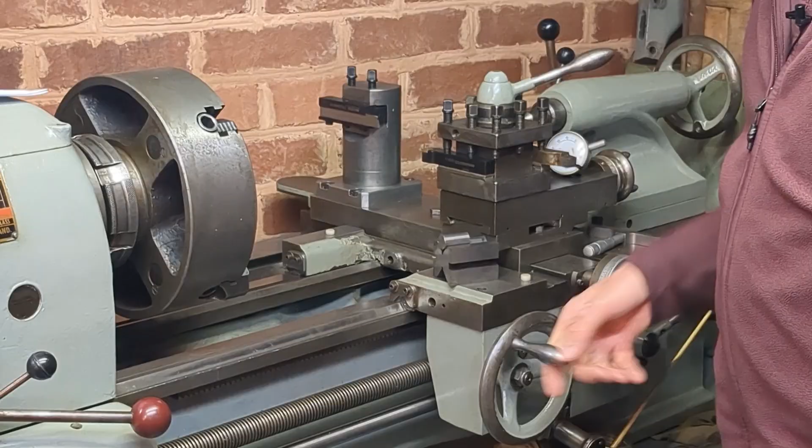Having just completed a few projects on my milling machine, I thought it was about time I returned to one of the lathes, and today I'm going to be working on the Colchester student lathe. This is a job I've been meaning to do for some time. I've never had a saddle or carriage stop for this lathe, and I've wanted one for some time. Up till now I've managed by clamping a piece of stock to the bed, but it's really not very convenient. There are second-hand carriage stops available online for this lathe, but they're ridiculously expensive, so I thought it would make an interesting project to make one anyway.

I'm going to use a piece of 2-inch mild steel round stock, which seems to be about the right size, and it will clamp in this position here. I'm going to make it so I can use it on both sides. On this side it would be used as a stop, and on the other side I might use it with a DTI.

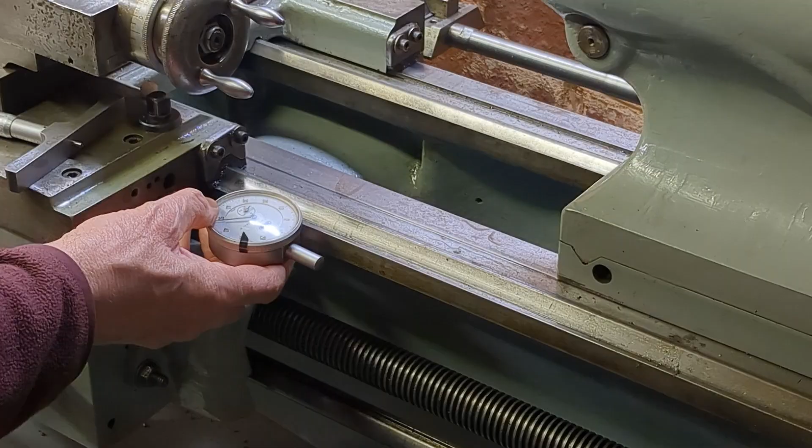I do from time to time use a DTI to index the saddle. Until now I've just done that by holding it off a magnetic base, but it's really not very convenient with this style of bed. So I'd like to have a feature on the carriage stop which will hold a DTI.

I was thinking about having a thimble style adjuster on the carriage stop, but I don't really think that's necessary. I think a feature to hold a DTI, combined with the top slide, will really make that feature redundant.

I didn't want it just to rest on the two flanks of the V with a locking feature underneath, because there is a tendency for the whole thing to want to rotate. To resist that rotation, what I'm going to aim for is location on two flanks of the V and the front face, with the locking feature underneath.

That will give a more positive location, and also if I make it long enough it will make a more stable carriage stop which I can index along if I ever want to use gauge blocks.

Now, to ensure location on these two flanks and the front, I need some good measurements. The way I went about that was to use my smallest V block with this bit of stock in here.

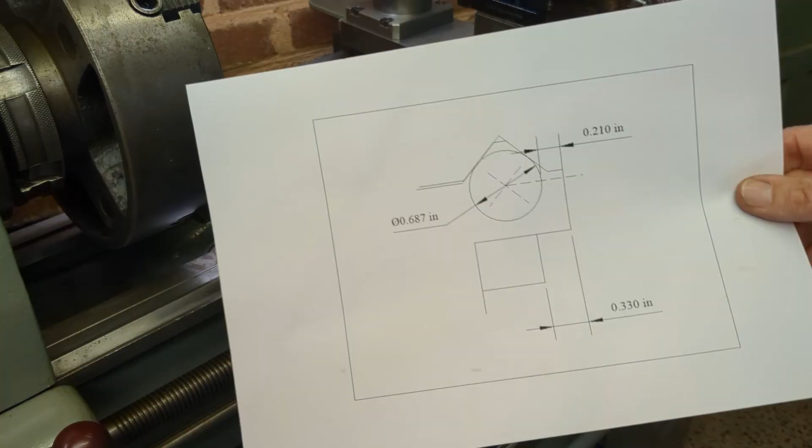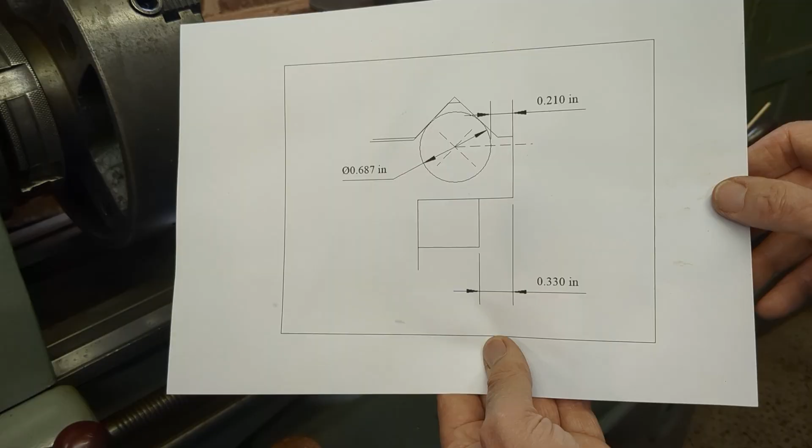Those two measurements I transferred to my CAD drawing, which gave me fairly precise dimensions of the two flanks of the V in relation to the front face of the bed. That was the first part of my layout, and hopefully that will enable me to achieve a carriage stop that won't rotate. Also, having good dimensions will hopefully minimize the amount of trial and error in getting this to fit on the bed.

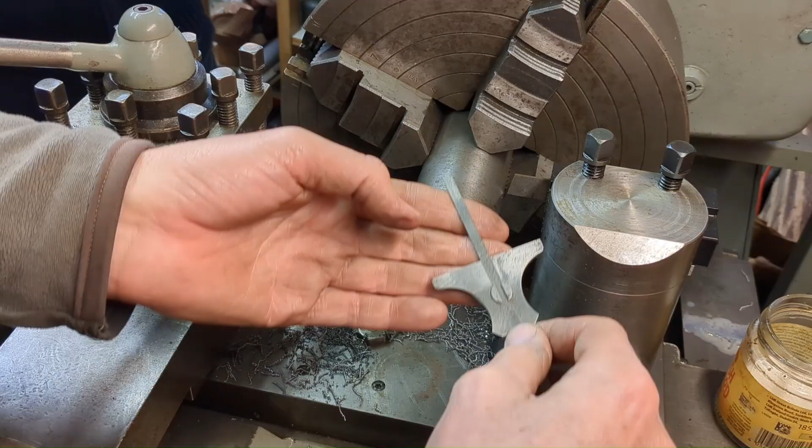So I'm carefully setting the parting tool and locking the carriage to part off 2 inches of stock.

I put some considerable time and effort into making this rear-mounted tool post, which I'm now using for parting off, and I thought I had solved the problem of parting off, but as you're about to see, I had another foul up—though I think I know what the reason was.

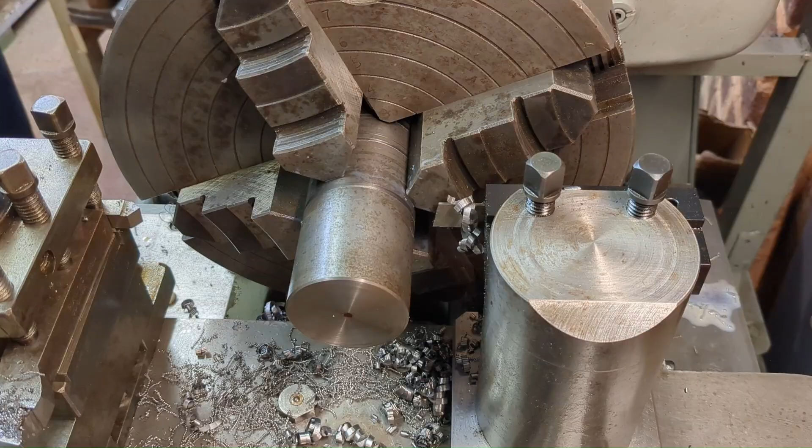Okay, after that nasty foul up, I've reground the parting tool and brought it out just over an inch, so hopefully we can get right the way through. I'm just taking it very carefully.

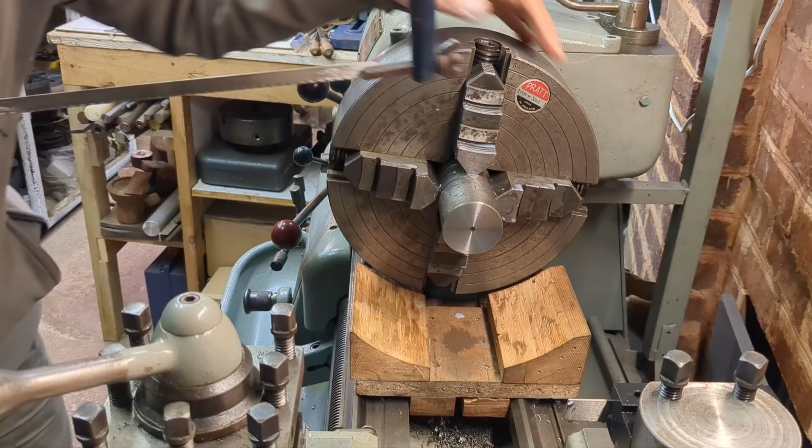I could hear a change in the sound of the cutting towards the end there, so I thought that last little bit I'm not going to risk it. I'm just going to cut that off with a hacksaw.

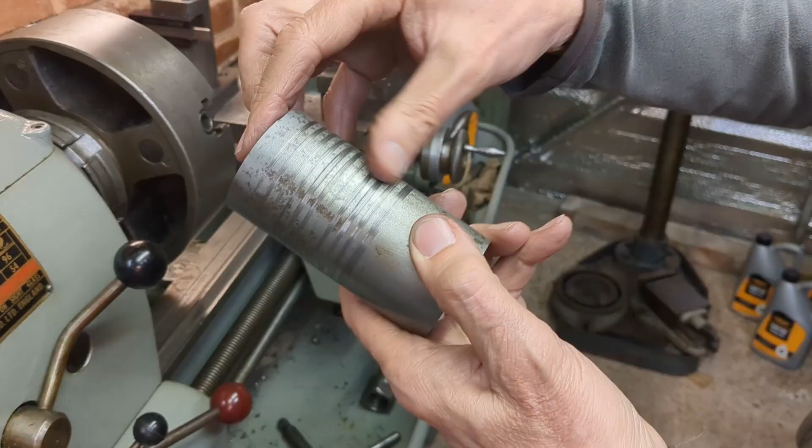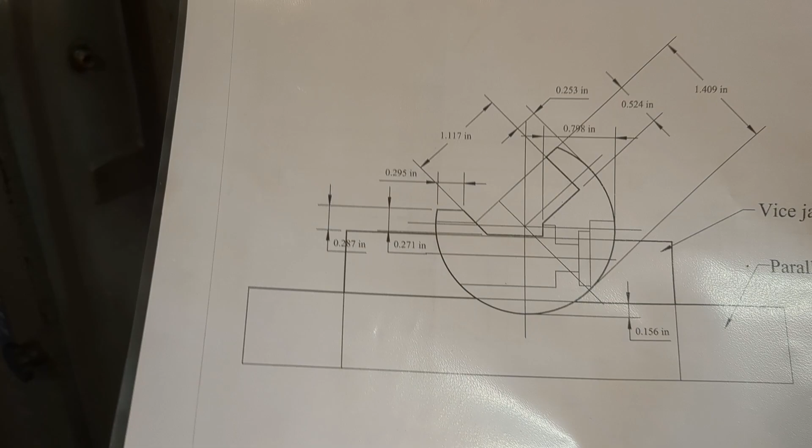Just in case you think the chuck wasn't fully tightened, you can see how the jaws have really dug into the material there. Now I've thought a little bit more about the setup I'm going to use, and for machining this slot, I'm going to use the vertical head. So I'll come in, machine these surfaces, then rotate the head 45 degrees and come in this way. I figured the best way of doing that is in my smaller vise, sitting the work on a parallel or a couple of parallels.

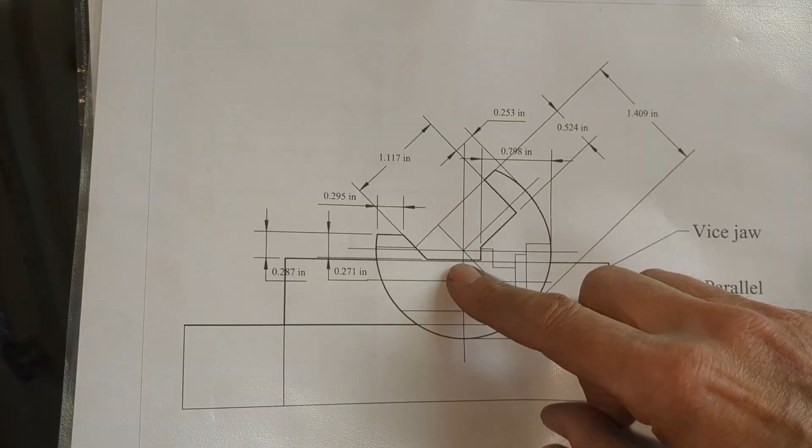So I'm going to put a couple of slots in the rear, and that will just ensure that the work sits lower in the vise. I just have enough clearance there to machine this out without touching the top of the vice jaw, so they give the maximum possible seating area.

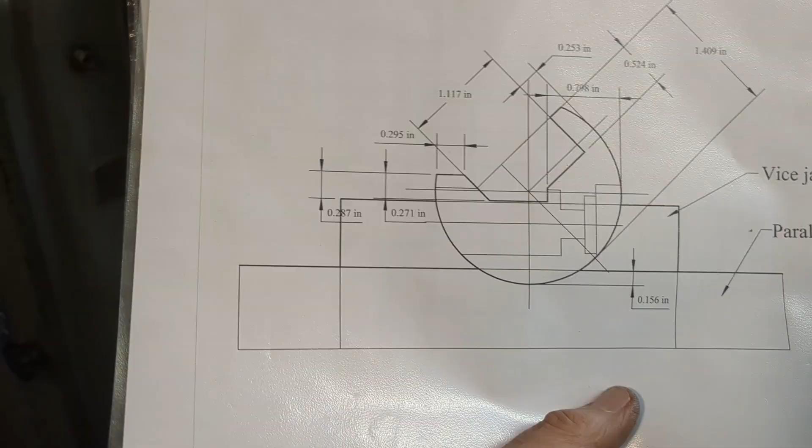The other feature of this is it will enable me to index it around to get this vertical for boring. So I'll use this slot as a measuring device for when I need to rotate it 90 degrees. So I'm going to go ahead now and machine these two slots. Just touching off the top there, that's a 2/1000 gauge, and then we can work out how far to bring the table up.

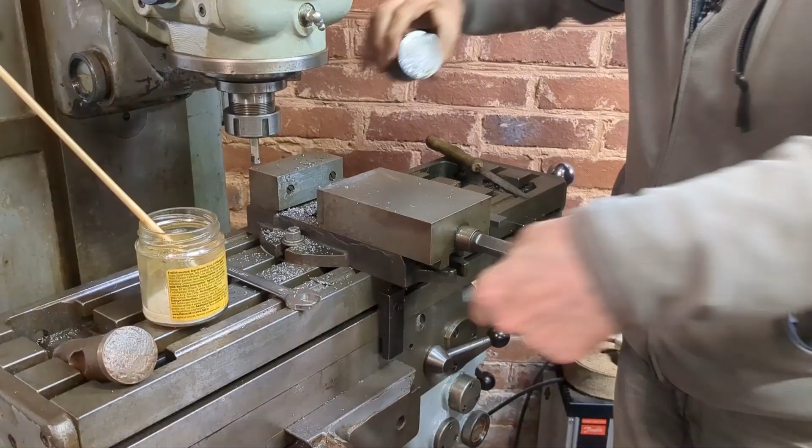So the square is clamped to the work in the slot, and I'm using the DTI to tram the square.

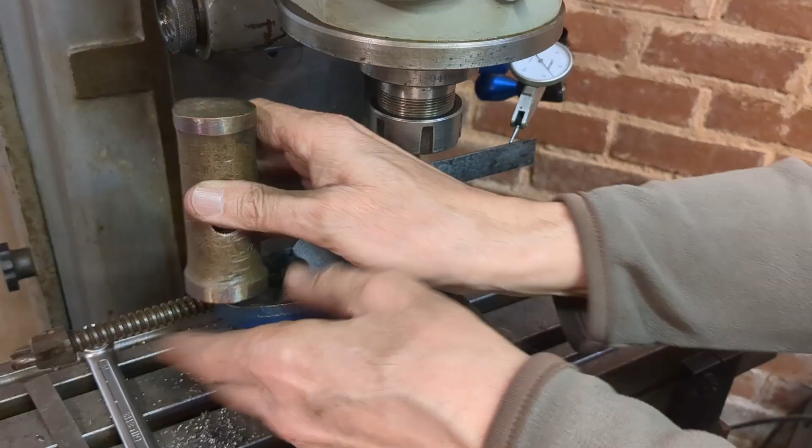The position of the cross hole relative to the slot, which will be machined later, is actually quite critical. So I'm carefully measuring from the diameter, again using a feeler gauge, and also from the end of the work to get the true center line. And even though I took some care over this, you'll see in the next video that I didn't get it quite right and had to make a slight adjustment.

I'm counterboring the seat for the bolt head, and there's a bit of chatter here, because this tool is actually flat bottomed. I couldn't be bothered to regrind it. And now, at last, center drilling for the bolt hole.

Now, because my mill is actually a horizontal mill with a vertical milling head, I don't have a lot of height. So for these kinds of operations, I transfer the work in the vise to my pillar drill.

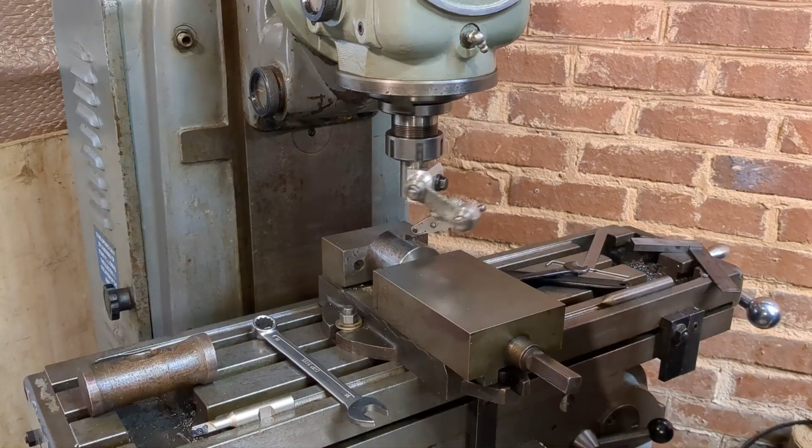Good, that's centered over the hole now, so we can remove that and put the boring head back in place. Without disturbing the work in the vise, we're back on the milling machine, and I'm now counterboring for the head of the bolt.

Okay, I've reversed the component, put it upside down, so we're going to bore from this top surface, or the bottom I guess it is. I put the square again on the slot there, and I'm just tramming it up. Actually, it's not as difficult as it looks.

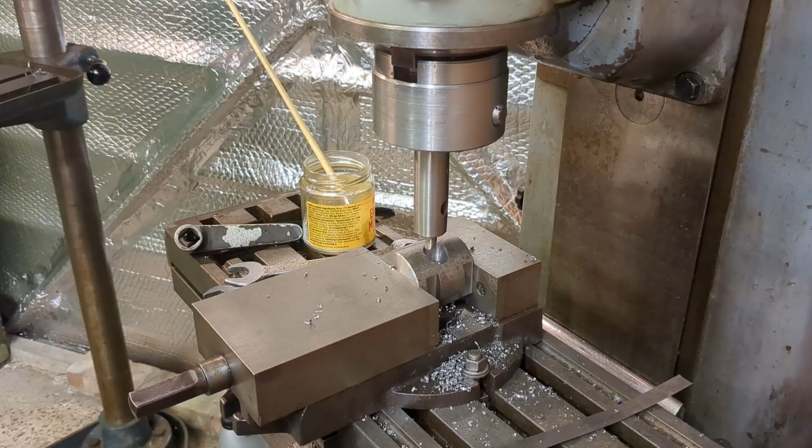Okay, the problem we've got is that I don't have enough height on my machine. I can't bring the tool out anymore. Really, I need to reduce the length of this shank here. It doesn't need to be that long on my machine, but that's not a job for now.

Well, with some difficulty, I've set this up in my 4-jaw chuck using soft jaws, which actually makes this a little bit more difficult. I've got it square with the axis of the machine this way. I've got it reasonably square this way, but not as finely as I want it.

And I've got a bit of a problem here. I picked up this bore, that's reasonably concentric, but the drilled hole isn't. That could be for two reasons. It could be that there's some misalignment between the center I took from the top and the one I've machined from the bottom, or it could be that the drill's wandered, or a bit of both.

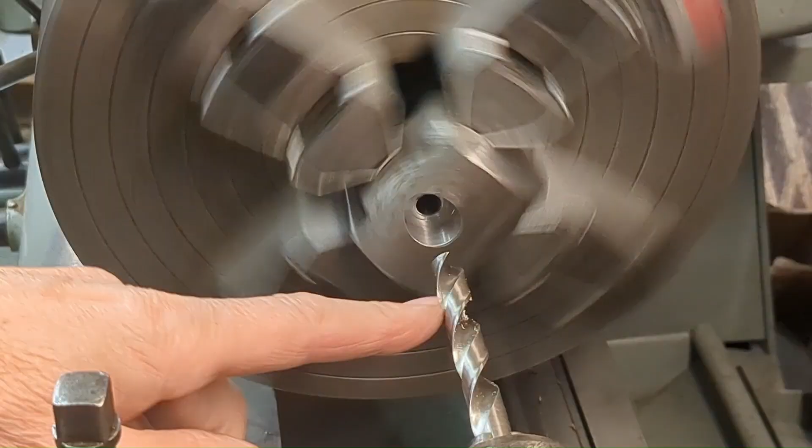So what I'm going to do is rough this out in this setting. I'm going to drill this out almost to depth, and make a little spigot that goes in the end there, so I can pick up the center of the hole at the other end, which is what really matters. You're probably going to see the drill wander a bit because that central hole isn't running concentrically, but we're just roughing out at the moment.

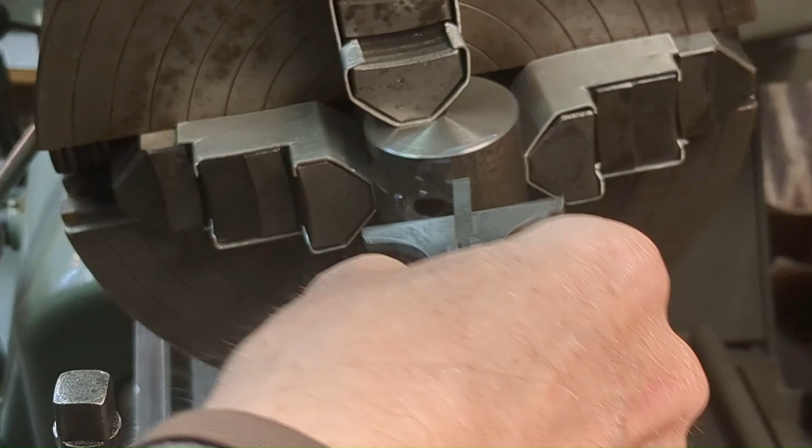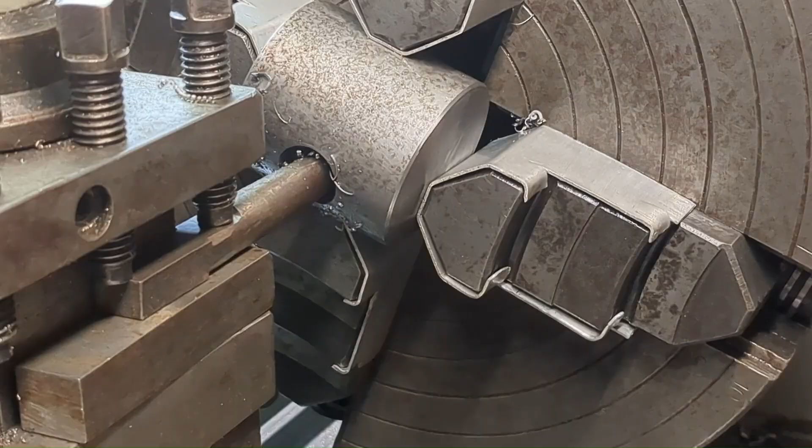Okay, I'm just roughing out the hole. This is really where I could do with a saddle stop, but anyway, I'm managing with this blind hole, and I'm taking it as close as I can to the final size before finishing. I want to get down to the bottom of the hole so I can put my little gauge in to measure the concentricity of the hole at the bottom, the clearance hole for the bolt, and also just so I can see what I'm doing.

I made up this little arbour here, which got a nice fit on in the hole, and of course it's going to go right to the other end. I'll put a centre in the end here as well, and then we can use this to see how much real run out there is.

Okay, we've got a total run out now of 15 thou, which is quite a lot. So what I'm going to do now is adjust this and center on this, and at the same time measure to ensure that this is parallel with the axis of the lathe. Once I've done all that, I can try boring this out.

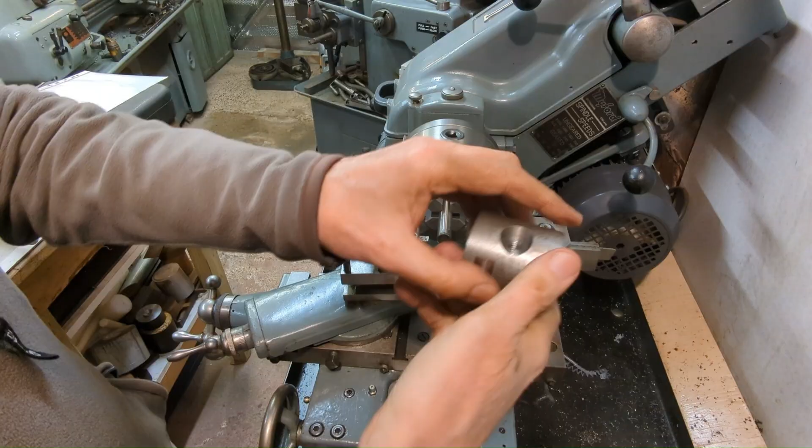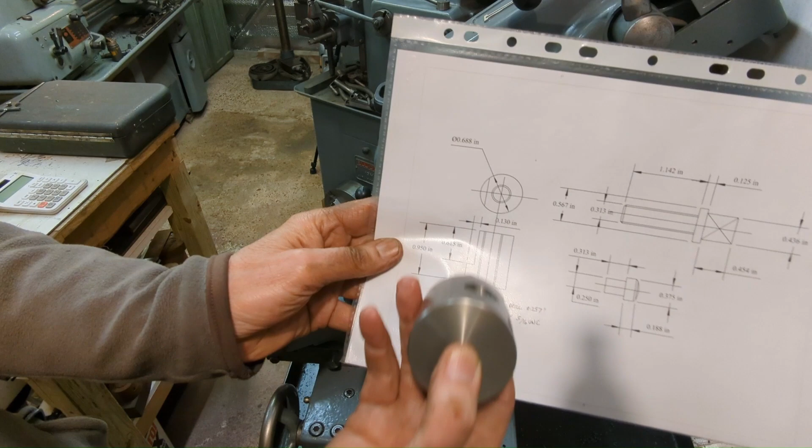Okay, the nut's now finished. It's deliberately too long - that should be the place where it ends up, but obviously with the clearance at the bottom of the hole. The reason I made it too long is so that I can put the bolt in the end here, tighten it up, and then mill out this slot, and automatically it will profile the cotter. I called it nut just now, but it's a cotter, isn't it really? So that profile will automatically be milled out when I mill the whole block.

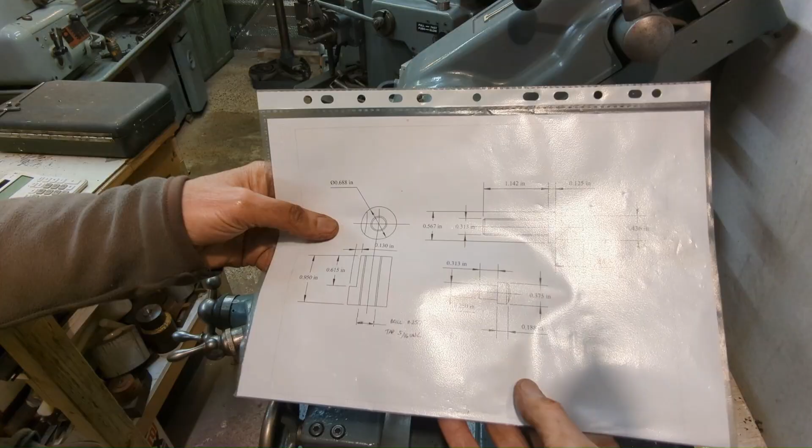What I'm going to proceed now with is the bolt. So it's a 5/16 UNC bolt with a square head, and I'm going to turn it on the Myford lathe, cut the thread, and then finish it off with a die, and then take it over to the milling machine to put the hex head on. And I'm cutting it from silver steel so that I can harden and temper it.

So having cut the thread and chamfered appropriately, we're going to take this over to the dividing head in the milling machine.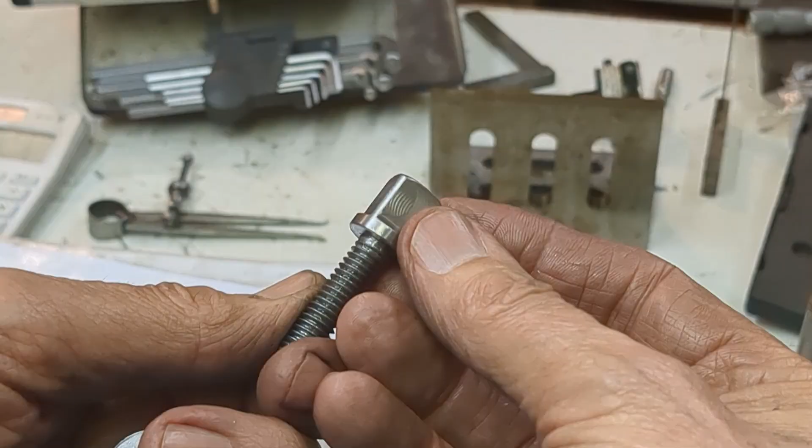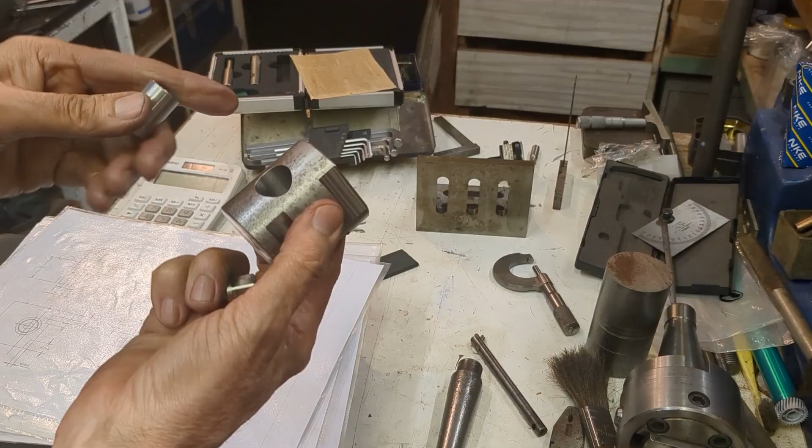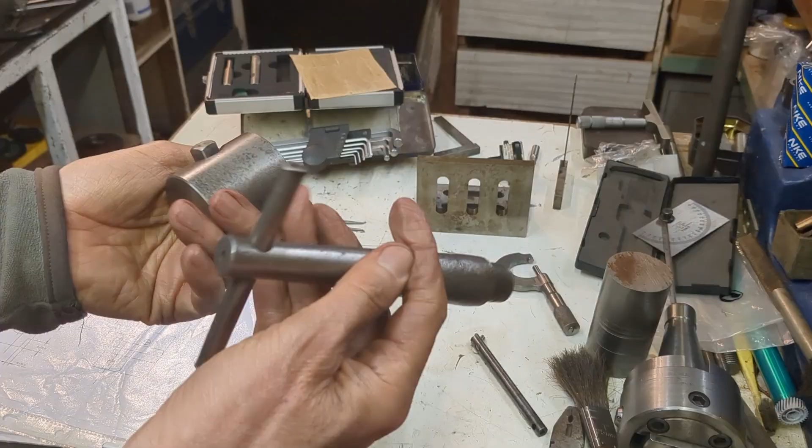Okay, after tidying up with a file, here is the bolt and the cotter that it goes into, and the cotter will go in there, and the bolt comes in the top. Now I've left a little counterbore there so that this neatly comes down flush like that, and the reason for making this style of head is that I can use my universal spanner, which fits the other features on my lathe, to tighten this up.

So I think this is a convenient point to stop. Next video we'll finish this off. There's a few operations yet to do, and of course the most interesting one I think is going to be cutting out this slot. Thanks for joining me. I hope you join me next time.